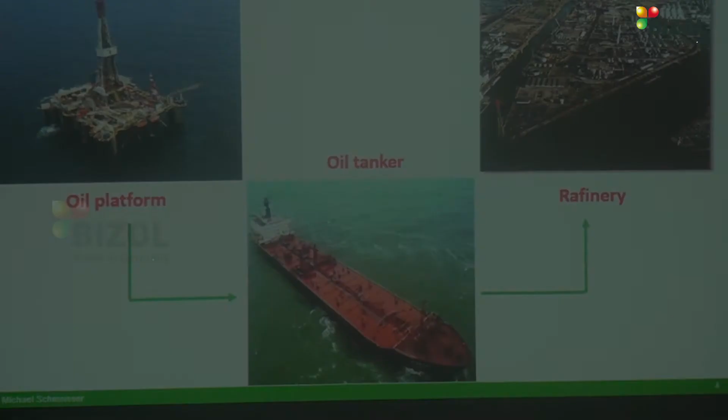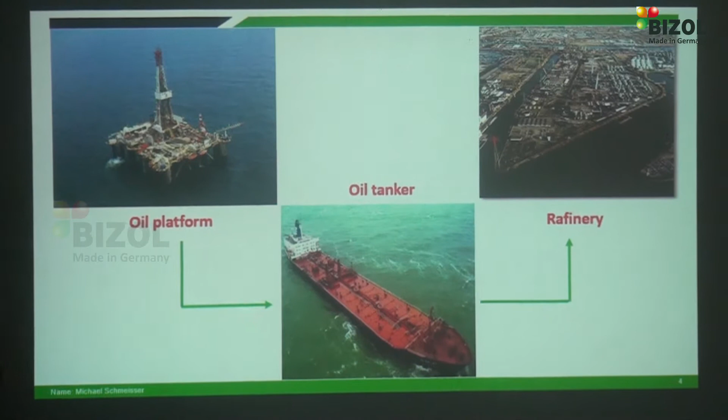This is a refinery in Germany near Hamburg, in the north of Germany. There starts the producing and developing process for lubricants - engine oils, axle oils, gear oils, hydraulic oils, pressure oils, whatever. Here starts the producing process for these different lubricants.

The question is what we need for the chosen raw material. The raw material, second one, is what kind of base oils we have. We have three different base oils, for example: mineral oil, HC synthesis - which is also a kind of semi-synthetic - and fully synthetic base oils. These are the three kinds of base oil we have.

From these base oils we produce lubricants, and the second thing is what kind of additives. The base oils alone are not possible to use for a lubricant, for example for engine oil or gear oil. We need different additives. Additives means different ingredients for the oil - for example anti-wear additives, anti-foam additives, corrosion inhibitors, detergent dispersants, which are for the cleaning process.

We have viscosity improvers that help the oil stay stabilized across all temperature regions, and many more additives needed for developing a lubricant. In an engine oil, for example, we have approximately 75% base oil and about 25% additives. It's also different depending on what we develop for an engine.

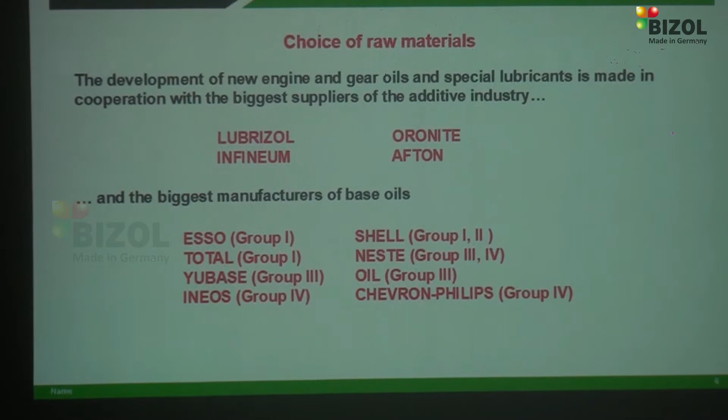On the other side, we work together with the best additive suppliers worldwide - Lubrizol, Infineum, and Oronite. That is the biggest and best developer for additives, and we also have the biggest manufacturers.

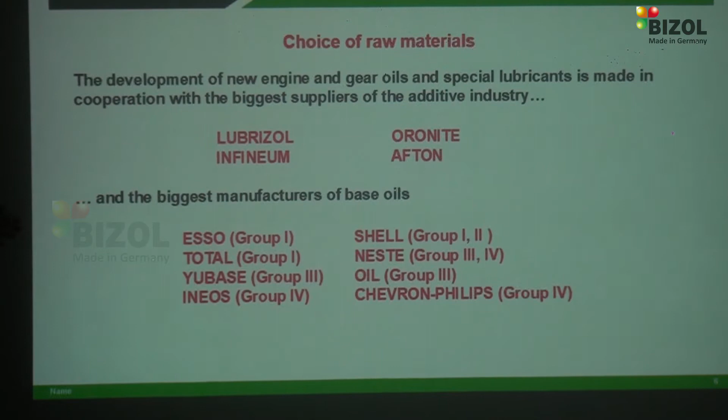We work together with base oil developers - for example Esso, Exxon, Total, Ineos, Shell, and so on - for the different groups. We have 5 groups of base oils.

Group 1 and 2 are used for mineral oils, and group 3 is only for HC synthesis production, used for the newest technology like 5W40, 5W30, 5W20. From these base oils the engine oil is developed, and group 4 is for fully synthetic.

Group 4 is a base oil that comes from PAO, polyalphaolefin, and from this we produce fully synthetic engine oils and gear oils. Group 5 includes the esters - also a base oil used for engine oil, but mostly we use group 5 for developing additives.

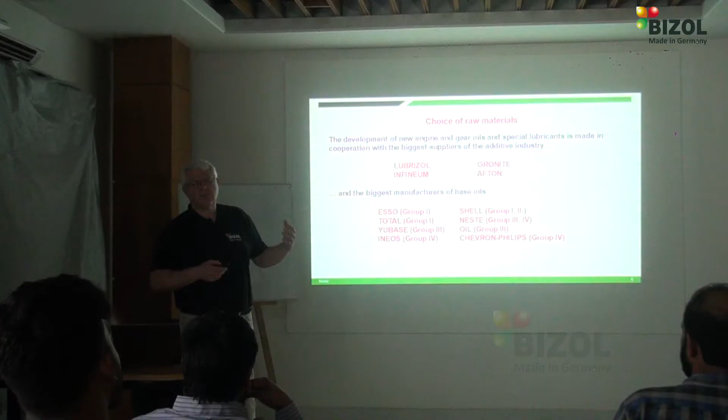That's the chemical substances we need for developing additives - that's group 5. Group 3, for example for HC synthesis, comes from the oil, and group 4 means developing PAO fully synthetic base oils.

By the way, this alone we cannot use for an engine oil, for example - we always need additives. And these packages inside the engine oil, this is what it means and how it works.

We have base oil, approximately 65 to 80% base oil. It's different depending on what kind of base oil. With mineral we need more, and when it's fully synthetic we need less base oil.

Then we have the VI improver, meaning viscosity index improver. We use this so that the thickness of the oil is always stabilized across all temperature ranges. It's an additive, but we also need the additive package, which is 5 to 25%.

It also depends on what kind of base oil we use. When we have a fully synthetic, we don't need such a big additive package - a smaller one is enough. In mineral oil we need more additives, bigger packages, so that we get very good performance.

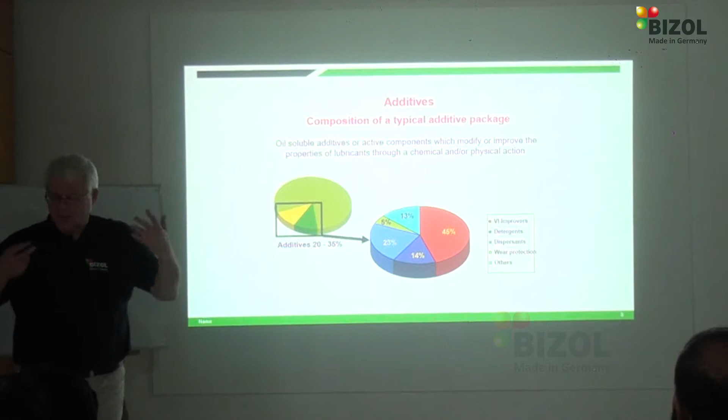In these additive packages we have various other additives - VI improvers, detergents, dispersants, wear protection, and others, for example anti-foam additives.

In engine oil, for example, there isn't so much anti-foam, but more in gear oils or axle oils we have more anti-foam additives inside. When the gears are moving and working, we get foam inside. We don't need foam for lubrication, and foam is air - air cannot lubricate any parts in an engine or gearbox or anything.

Now, when we develop a multi-grade engine oil, multi-grade means you can use it in cold temperature and high temperature. For example, you have 15W40 - you can use it when it's a little bit cold, in deep temperatures.

Here in Bangladesh you don't have the cold temperatures. When I speak of cold temperature, for example in Europe or Germany, the winter season starts now, and we have 0 degrees in the beginning, then it gets deeper and lower, down to -10, -15 degrees.

It's possible. For this reason we need thin oil, so you have faster oil circulation at low temperature. The number after the W, like 10W or 15W, means in winter time, and after that the 40.

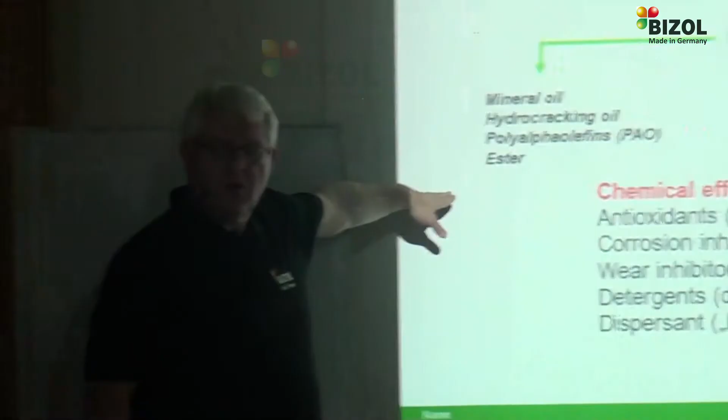Mostly we get a mineral and hydrocrack oil, and for this reason we need the additives. We have two types of additives: one with chemical effects, and the other with physical effects.

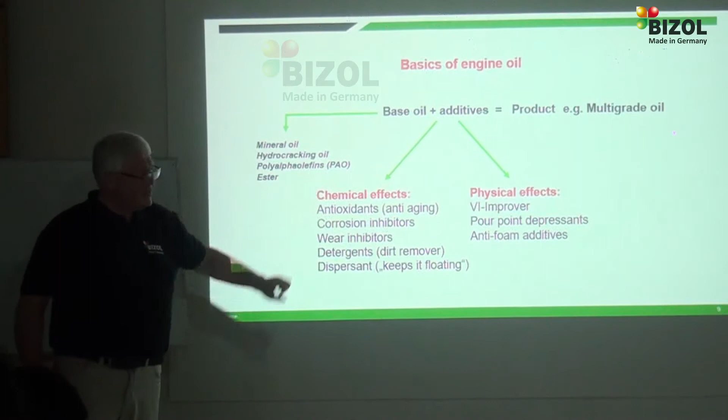With the chemical effects, we have for example antioxidants that you need, the anti-aging from the oils that gives you longer lifetime in your engine or in your gearbox.

Corrosion inhibitors: during the burning process, acids build up inside the oil. Maybe the ash from the burning process is a builder for acids. The corrosion inhibitors neutralize these acids and protect against corrosion.

We have wear inhibitors, detergent, and dispersant. That is the cleaning guard from the oil. It cleans up the oil directly inside the engine, or also for gearbox, but mostly for the engine, since we have a burning process there.

The physical effect is the VI improver, that's a physical compound, the viscosity index improver. It makes the oil thinner or thicker. And the other one, we have pour point depressants.

That is for the lower temperature, as I explained, in winter time we need a very thin oil so you have a very fast circulation, to reduce the wear in the engine.

And anti-foam, as I also explained, mostly for gearboxes, it's for anti-foaming so there's no foam in the lubricant. The foam can damage the gearbox, also the engine.

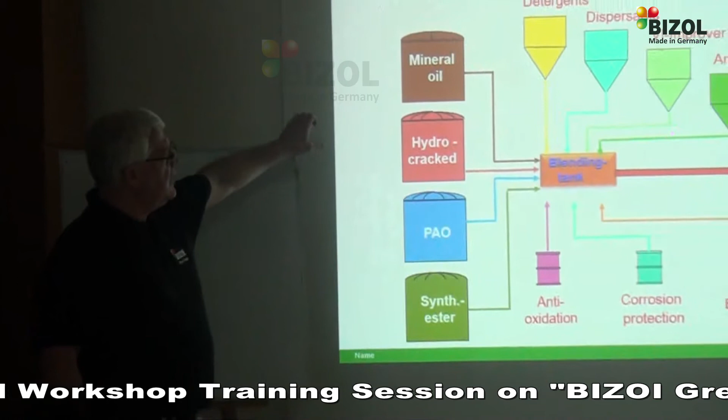Now in the real process, when we look for a base oil, we go into the blending tank with this base oil, and now we have different additives here, what we need more or less. The question is what we want to produce.

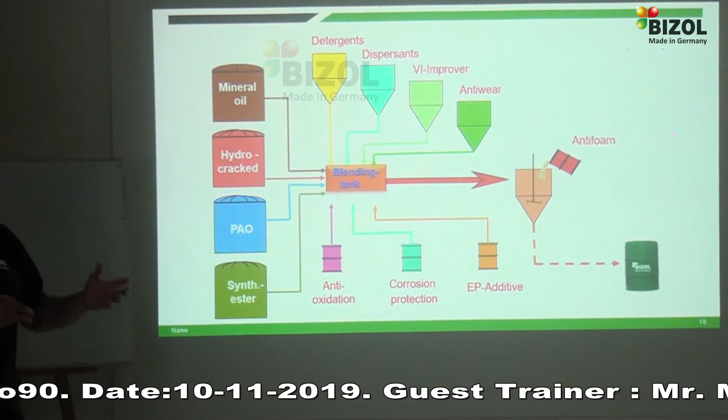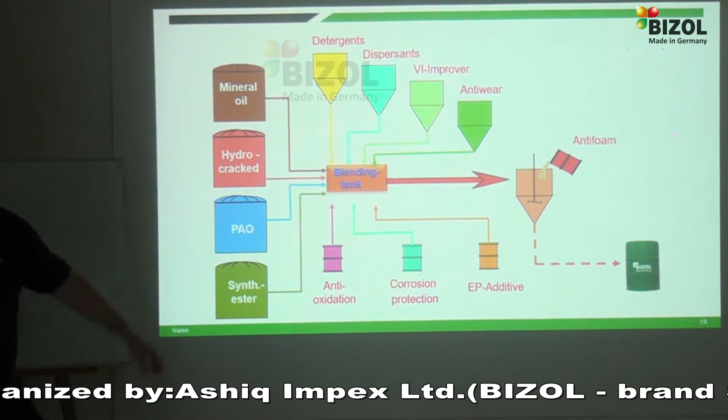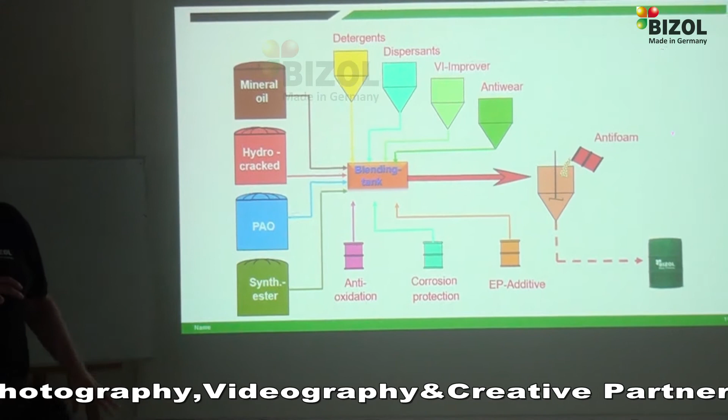Engine oil, high quality engine oil, middle quality oil, low quality very cheap - then you don't need so many additives, or we make gear oil, axle oil. For that reason we must look at what we need for additives, more or less. But the process is always the same.

We have it also in the industrial lubricants, always the same. We use base oil, and then we look for the additives what we need. That's the process.

Next, the viscosity. Most people think the number on the oil can is the quality sign. And I said we have 5W30, for example, or 5W40 - it's a very good oil.

But if I use the 10W40, that's not so good, 5W is better. This number is not a sign for quality, it's only a sign for the thickness and the fluidity from the lubricant, or from lubricant fluids.

For example, here is my coffee, that is very thin. Okay, you know honey, for example, that is very thick, but both always have viscosity, thinner and thicker.

My coffee I can use in winter, very fast circulation. And the honey, for example, is needed for summertime, very hot temperature like in Bangladesh, so it's thick but gets thinner from the temperature alone. I cannot use the thin oil, it's not possible.

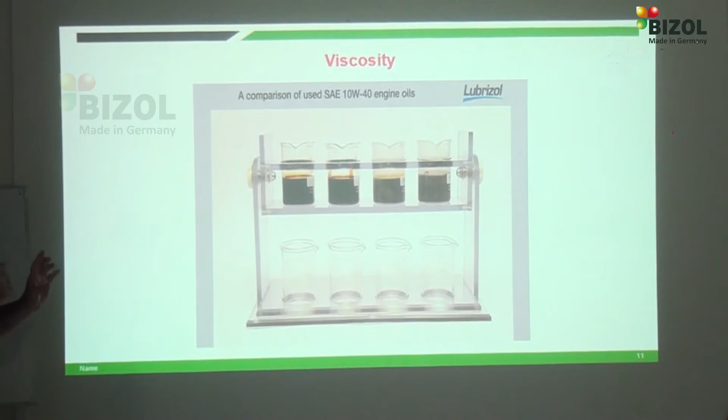It's only the thickness of the oil. Therefore it's measured in the laboratory how thick, how thin, giving different measurement times, but the oil must run at different times, from different thickness, from the force, and so on, by the temperature that was always measured in the laboratory. The difference in quality means the additives.

The problem is you can't see that. You can always look in the product data sheet, you can compare the different measurement results. We'll come later to this.

But now look, we have a 10W40, but it's good, it's good quality, good viscosity. We can use it, it's a low friction viscosity and very good.

Also the same used oil, engine oil, at minus 30 degrees. He said, oh, I'm not interested in that. That's right, but look, you have the benefits from this oil you can use.

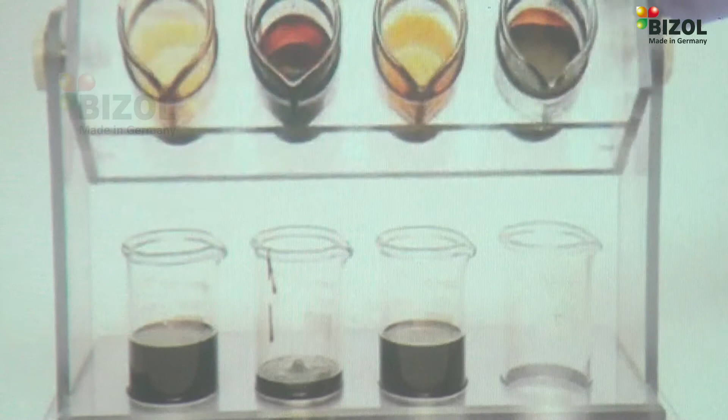That's where I show what I mean, that it's only the viscosity, the thickness, not the quality. You can see on the technical data sheet how it is.

From the specification, we have the API, the American Petroleum Institute in America. You measure this one and get API CI4, that is the highest for 15W40 CI4. We have different steps from the API.

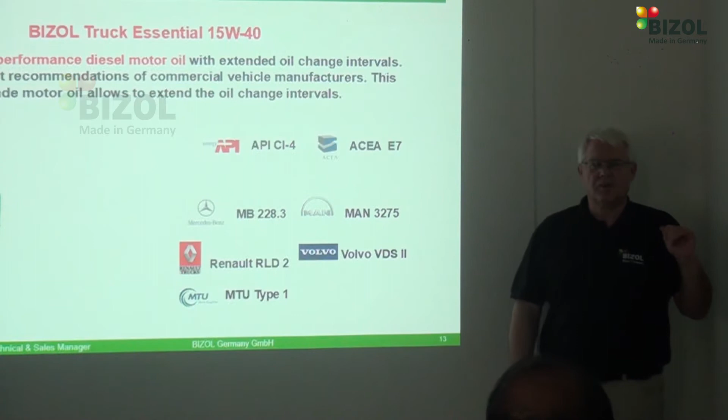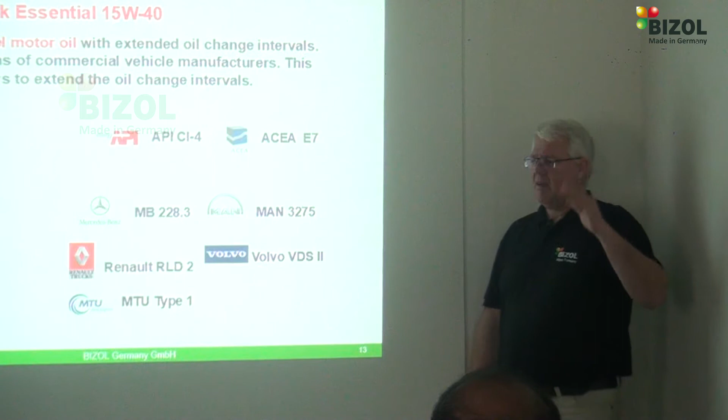The C category means for the commercial range, that is for diesel engines allowed. In Europe we have ACEA, it's French, European, I don't know French well. It's a society, European Academy, I don't know, it's complicated, better than API's but easier for me, no French.

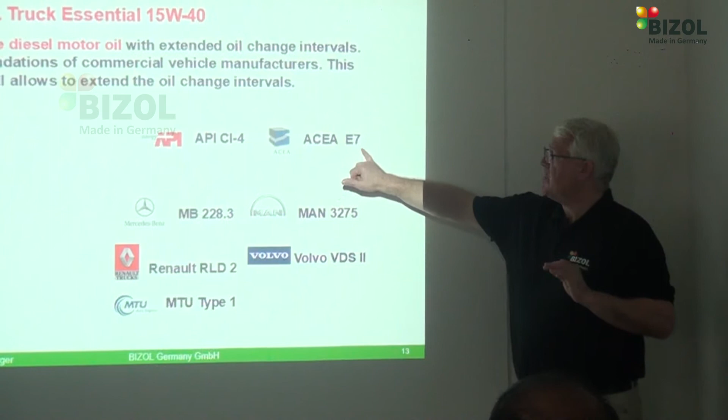We have the E7. E7 allows it in heavy trucks, with Euro emission from the standard Euro 6. We have very strong and strict emission standards for trucks in Europe and Germany. The latest is Euro 6, and all trucks must have an exhaust after-treatment system with filters, so many different filter systems inside, like SCR, selective catalytic reduced converter, and the DPF filter, the diesel particle filter, and so many more.

For this reason we need an oil that doesn't build so much ash in the engine. Ash builder also builds acids.

The other part, we also have the approvals from, let's say, Benz, MAN, Volvo, Renault, and MTU. MTU produces more industrial engines and not so much truck engines. They come also from Germany.

We have also specific oils for the longest drain interval and the middle drain interval. When I speak of the longest drain interval in Germany for trucks, you must not use 15W40, you must use 10W40 or 5W30, 30, 40, it's different. For the modern trucks we can use 100,000 to 150,000 kilometers for one oil drain. 100,000, it's a long distance.

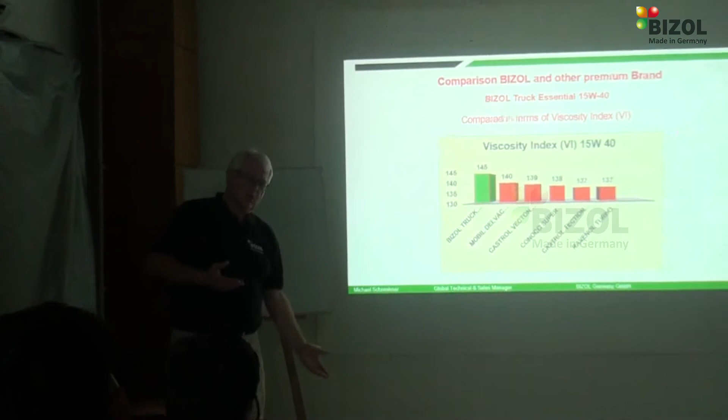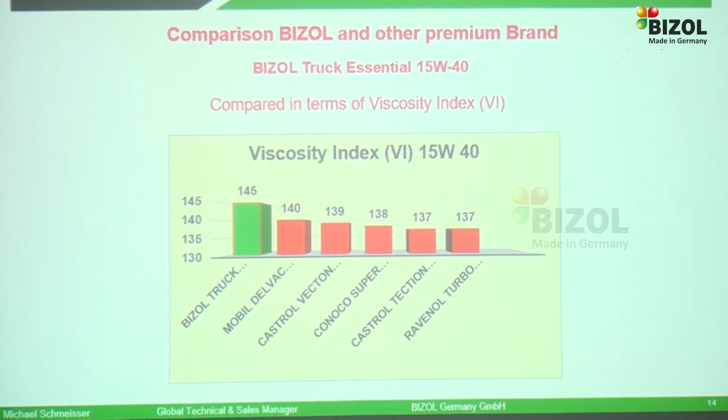And now another indicator for quality is the viscosity index. The viscosity index indicates if the oil has a problem. In winter or cold temperature it must be very thin, and in summer or hot temperature it must be thick, it must change. In winter thin, in summer thick, we change it, everyone thick, thin, but it's not good. It needs time, and you always have a little bit of wear at this time.

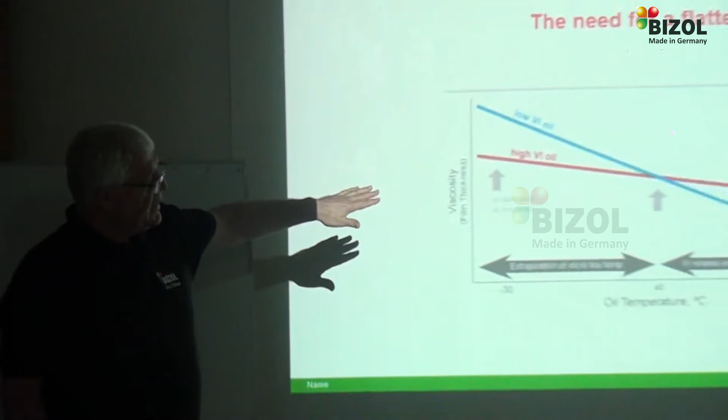We try to reduce this changing of the thickness of the oil, so that at every temperature it has the same thickness. For this reason I must jump to this next chart, we have the viscosity index diagram.

It means when I have a high viscosity index, and a high viscosity index you can only get when you have a very good base oil, HC synthesis or fully synthetic, then you have for example a number like 170, 180. For mineral oil you have approximately, it starts by 120, 125, that's the starting viscosity for mineral oil.

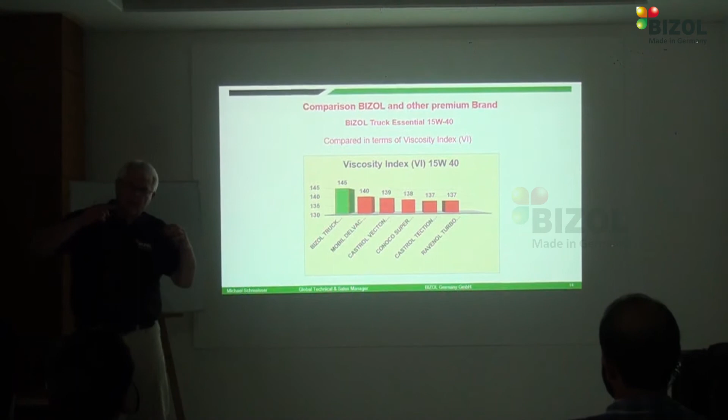When I go back and look here, our viscosity index is 145. That means the flatter line is very long, and the oil doesn't change thickness often, it's very stabilized at all temperatures.

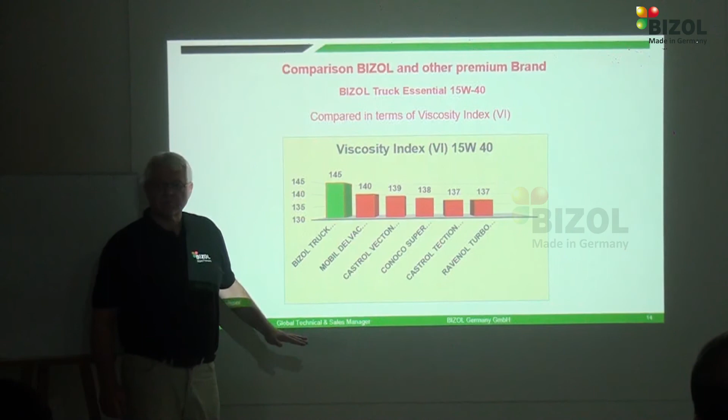And when you look at the competitors, for example Mobil with Delvac we have 140 viscosity index, Castrol 139, and so on. You can find this viscosity index, how high it is, on the technical data sheet of the different products, but that is from the competitors.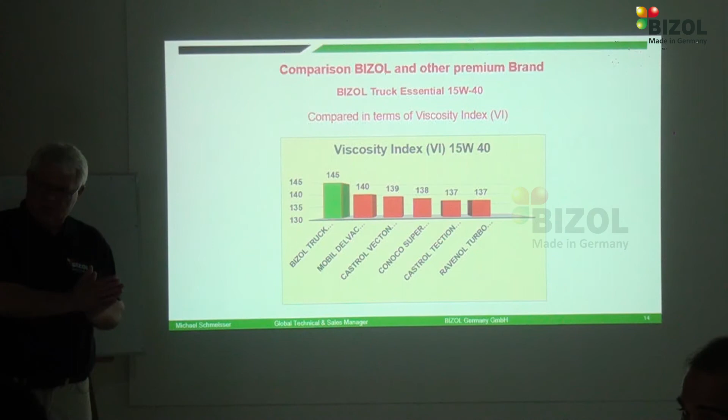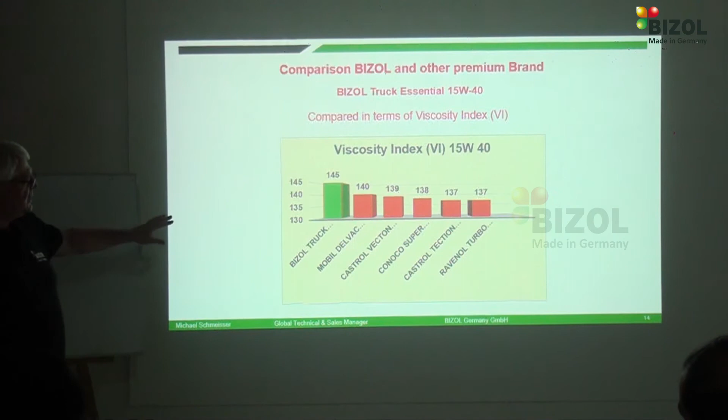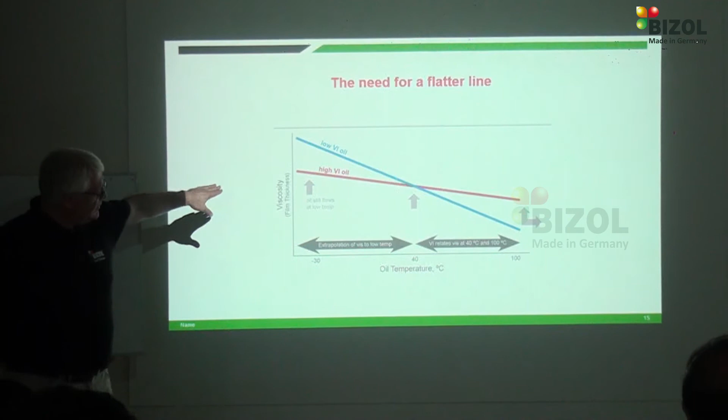So Castrol, Mobil, or whatever, Shell, and so many others, it's also described in our technical data sheet. It means we don't change the thickness of the oil from cold to high temperature, here's a flatter line. That is the best where possible, but it is not always possible. It's very good, high performance for the fully synthetic, and when we have this one, it doesn't change so much.

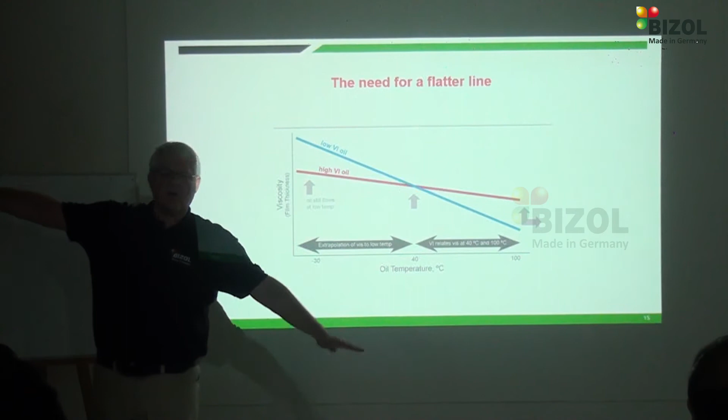Another indicator for good quality engine oil, by the way it's also for passenger car and for diesel, not only for truck oil, is the TBN, the total base number measured. It's the measure of the lubricant reserve alkalinity.

That means you neutralize the acids inside the oil. As I said, we have ash, through the burning process the oil builds a little bit of ash, and this ash comes back into the oil and builds acids. Acids are very dangerous for the material, it causes corrosion, pitting. This TBN is measured in milligrams of potassium hydroxide per gram, KOH per gram.

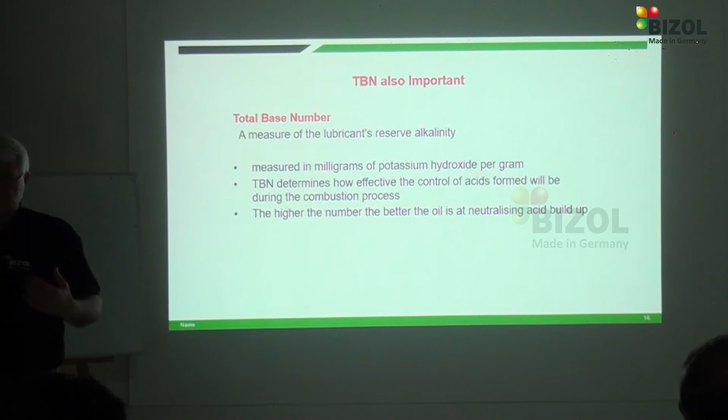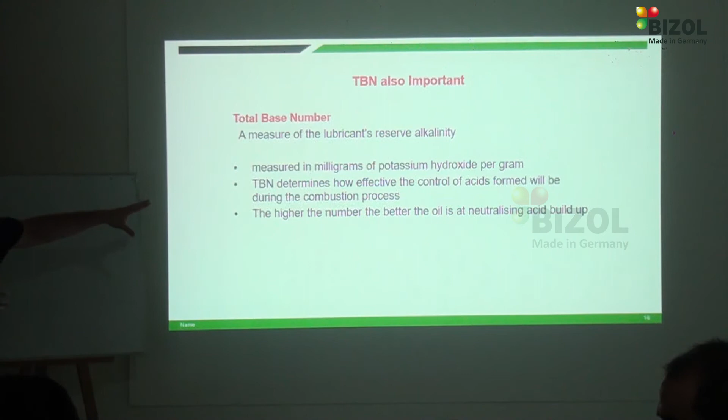TBN determines whether it keeps control of acid formation in the combustion process. During combustion and burning, acids build up and get into the oil. The higher the number, the better the oil neutralizes built-up acids. You also find this indicator on the technical data sheet.

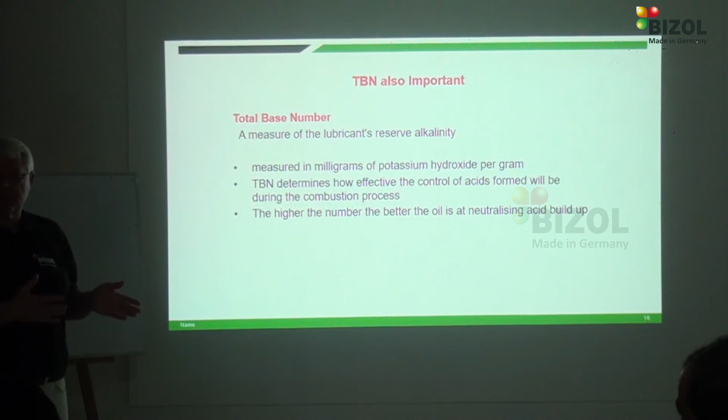We see this in engines, and also in industrial gearboxes, for example. On industrial systems, we also measure the TBN number for reducing or neutralizing acids. It's not only for engine oil.

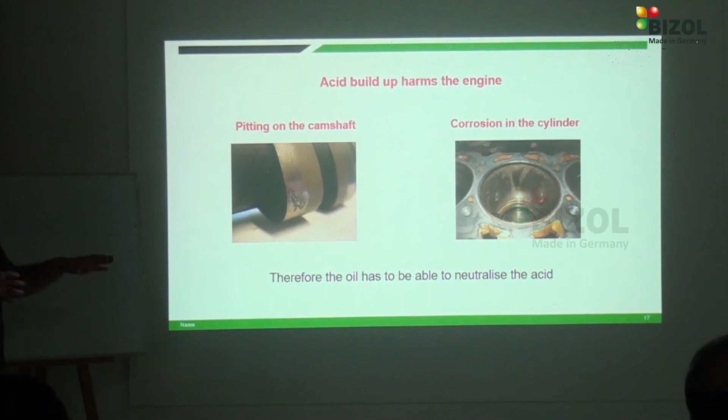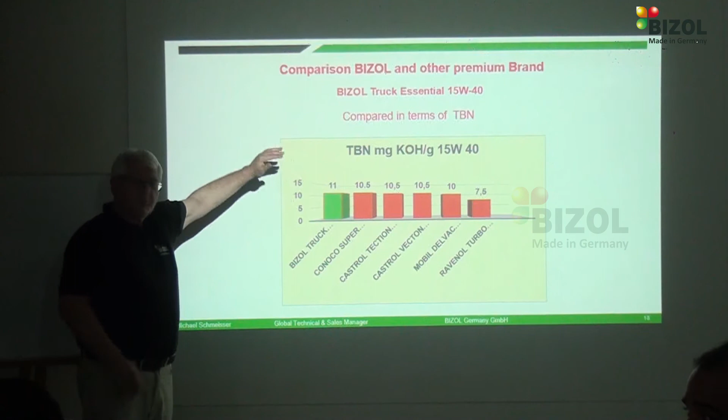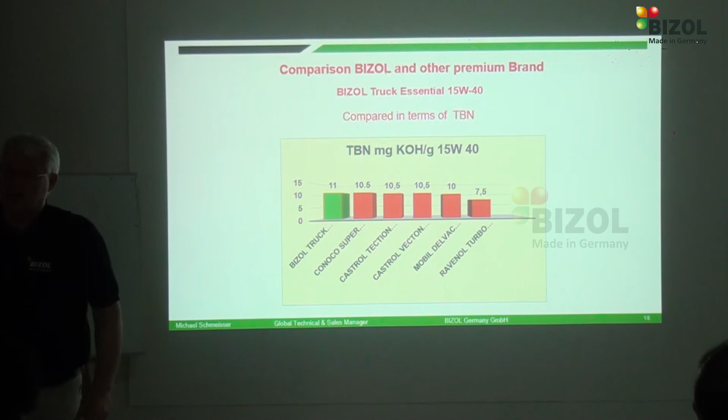Now with the 15W40, we have also compared it with competitors. You can see our oil has 11 - the higher the number, the better the performance and neutralization of acids. Conoco and Castrol both have 10.5, which is also good, not bad. But when we look at Ravenol, it's 7.5 - not so good for the neutralization of acids.

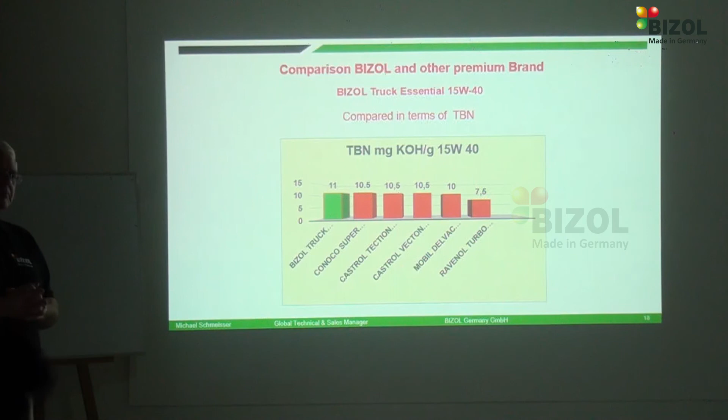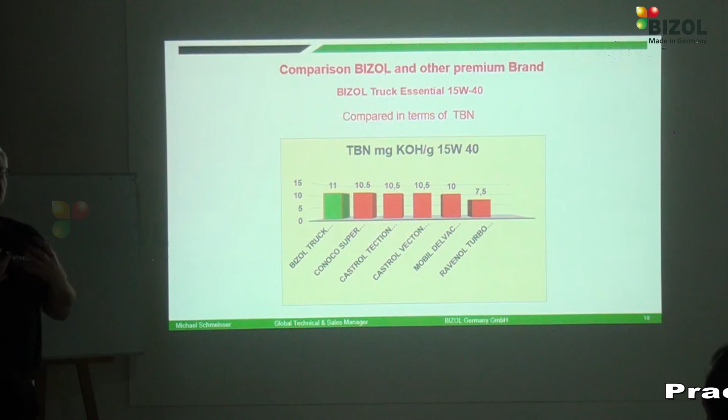This is important for truck oils - look for a higher TBN number. Trucks build more acids from soot and from the burning process, building acids in the oil, because the truck works very hard. For this reason we have much more acids in the oil.

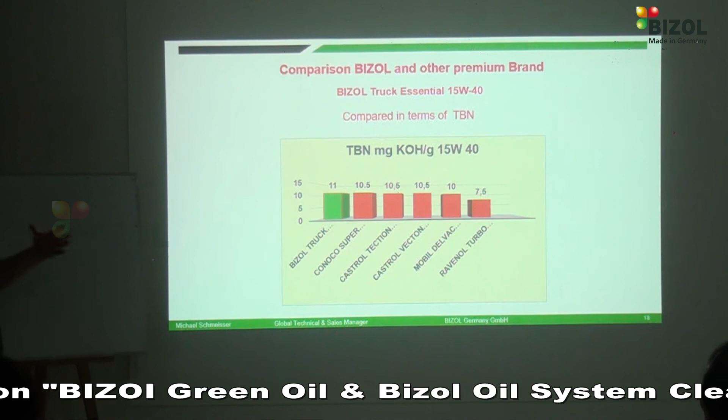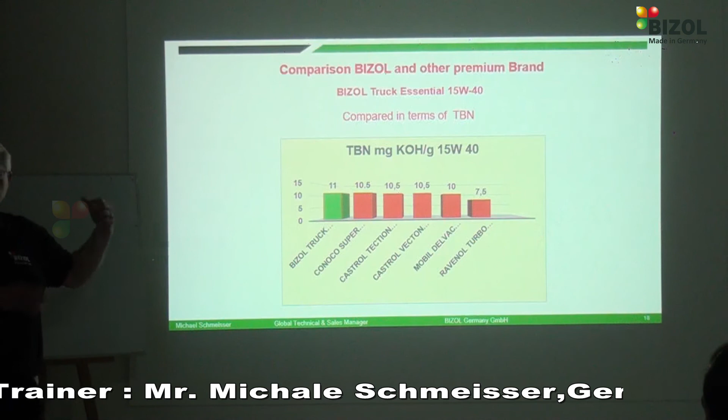Now, that was a little overview about oil - where it comes from, where it's produced, the different additives, and also the indicators of what gives good or high quality engine oil, for example.

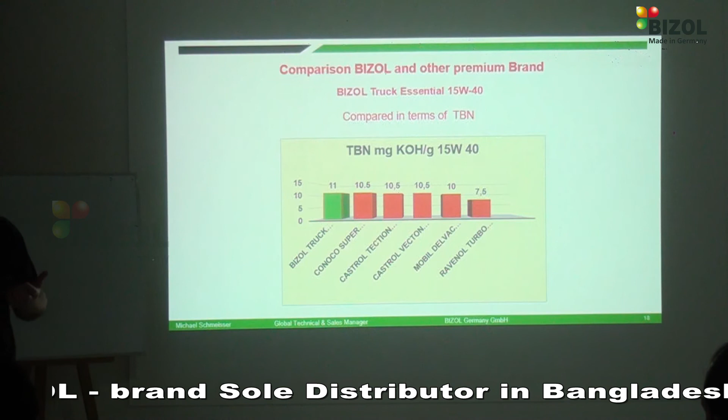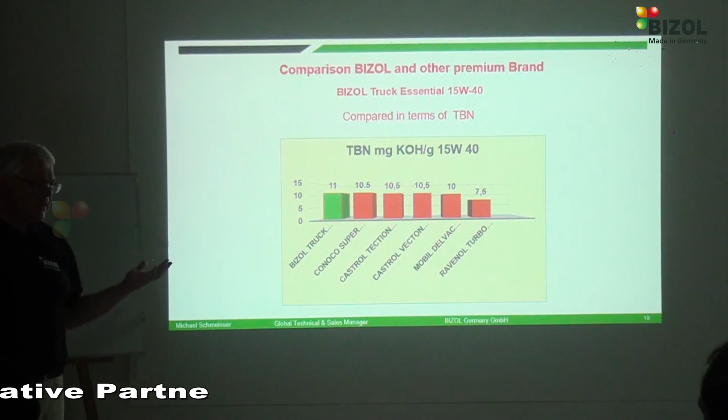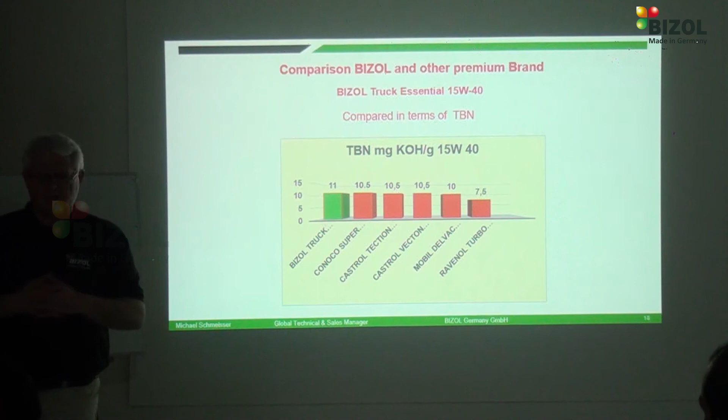But the other side is when you don't use a high quality oil - you can use cheap oils, why not, they do the work too - but they can build so many deposits in the engine. They can build sludge in the engine, and the sludge closes the oil circles, the oil lines in the engine. The problem is you don't have good oil circulation, and when I don't have good oil circulation, I have the risk of very high wear in my engine.

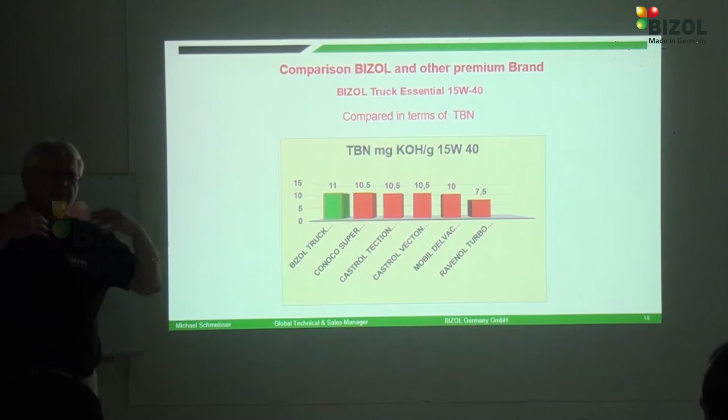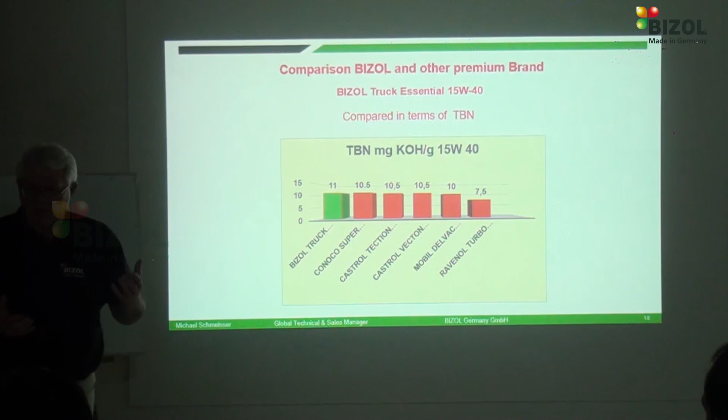For this reason it's better to buy a high quality engine oil with plenty of detergent and dispersant additives inside, together with a high performance base oil, to clean up the engine so that you cannot build oil sludge. When you've used a cheap oil before and have the problem with sludge and deposits and so on...

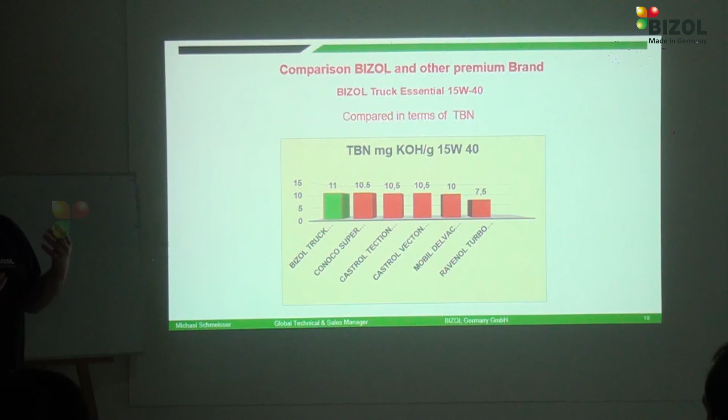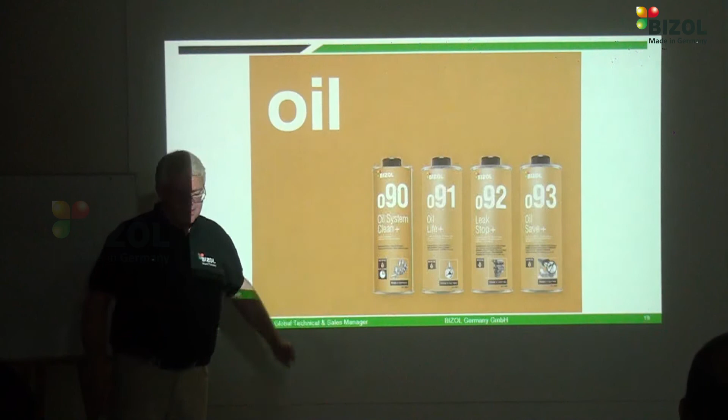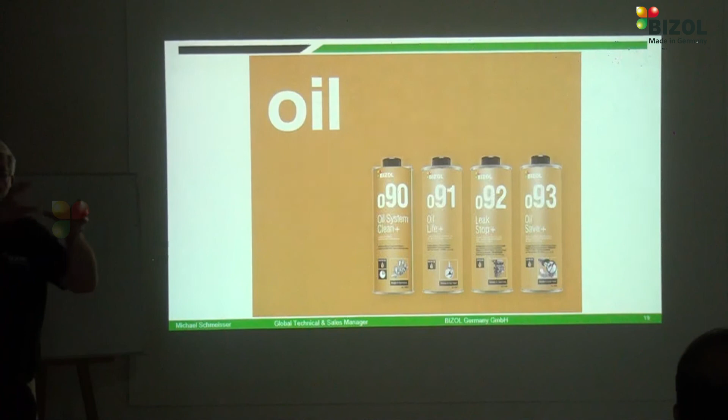...then for example use an oil system cleaner like this one. The oil system cleaner is a high concentrate of additives, detergent and dispersant, which I put in before the oil change, inside the engine. After that, the engine runs for approximately 15 minutes, and then I change the oil.

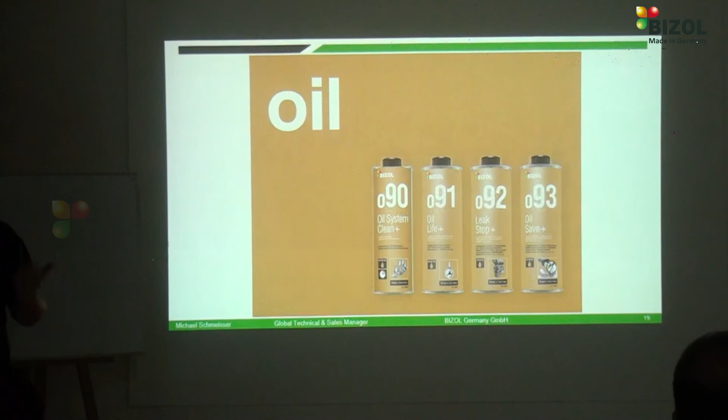I have here a little example about the pistons. You can see this piston is very coked, the piston rings have coked and cannot move. When the piston rings cannot move and aren't working, then the piston rings' task - to seal the combustion chamber from the crankcase - fails, and fuel or the fuel-air mixture can get into the crankcase.

This is called blow-by: through the gap from the cylinder wall to the piston rings, gas gets into the crankcase and mixes with the oil. This damages the oil over time. Fuel getting into the oil makes its viscosity thinner, which is very dangerous, especially for trucks doing hard work. It's possible that the oil film shears under high temperature and heavy working. When you have fuel in there, it cannot lubricate the parts - it flushes the oil off the parts and the cylinder.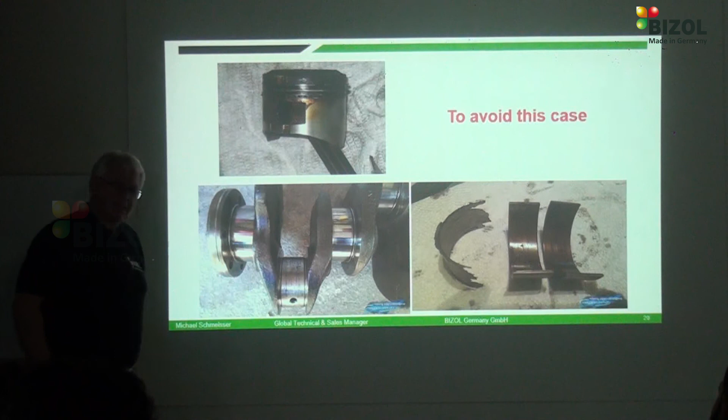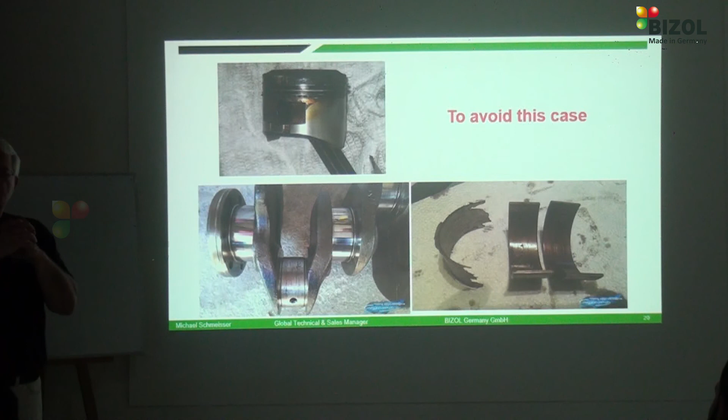This can be helped by using the oil system cleaner. Here's the crankshaft - you can see stripes on it, which also damage the crankshaft, along with this bearing on the right side. He damaged this one because the oil film was sheared, causing metal-to-metal contact under very hard pressure, damaging the material.